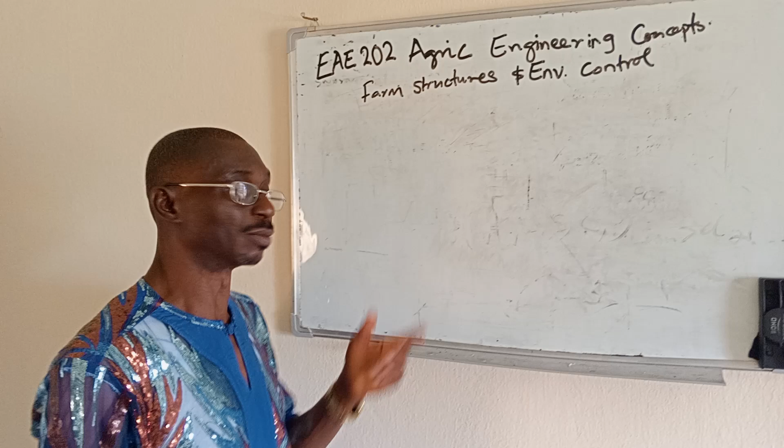So we are still continuing from where we stopped the other time, Farm Structures and Environmental Control. So you may say this is Part 2.

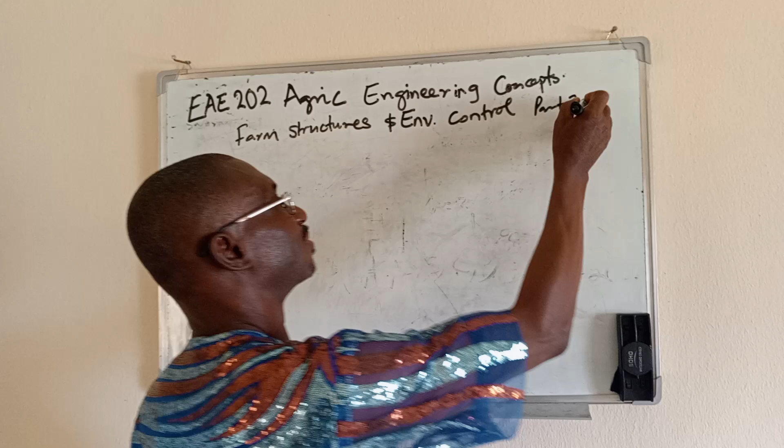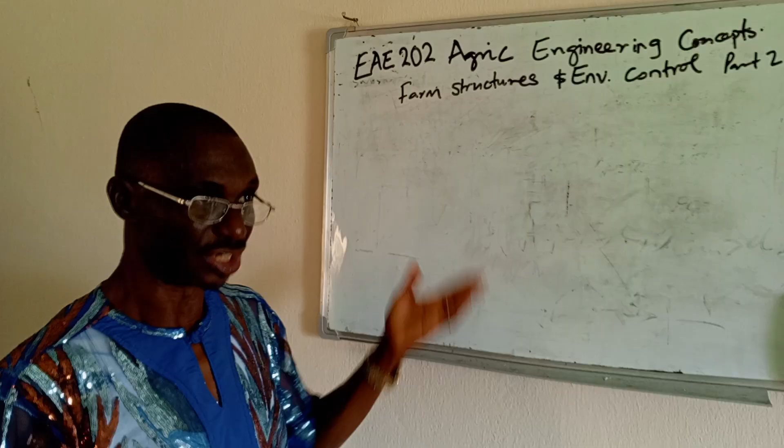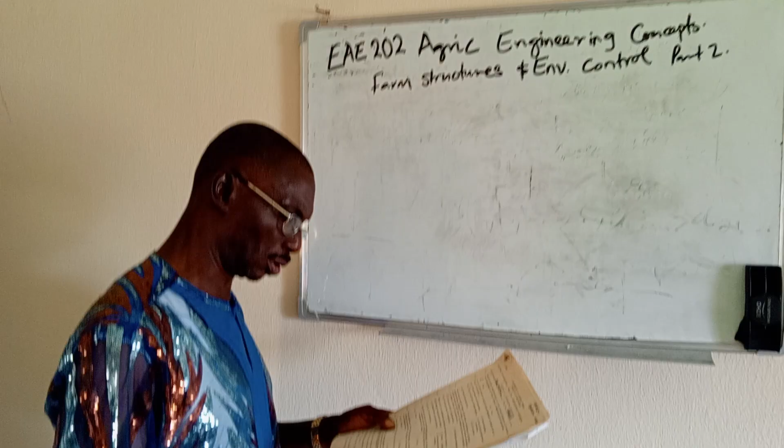So from the knowledge we gained before, what is expected of a specialist in this option? An engineer who specializes in farm structures and environmental control. From there, we can deduce that the design of farm structures, among all other things, requires a sound knowledge of the following, of the principles of...

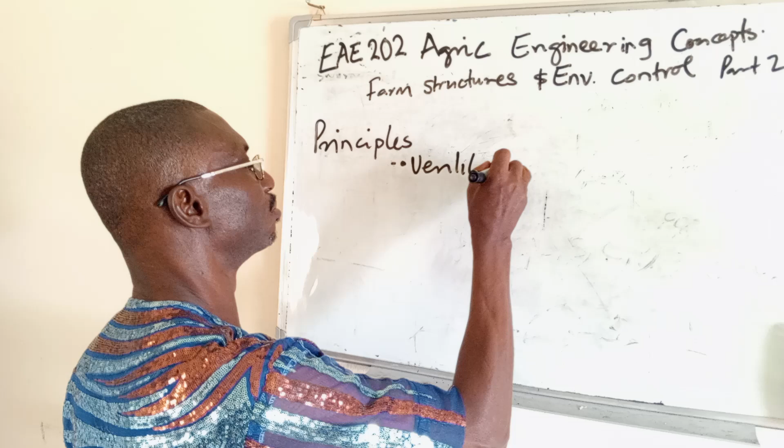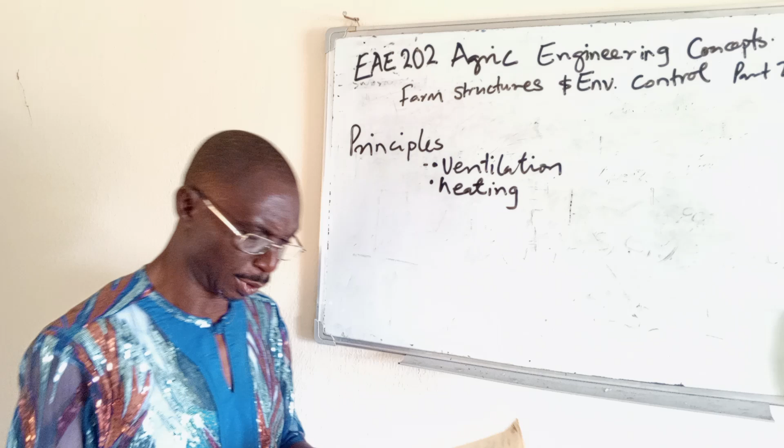Ventilation, so you require some knowledge of principles of ventilation, principles of heating, principles of cooling, and also principles of insulation.

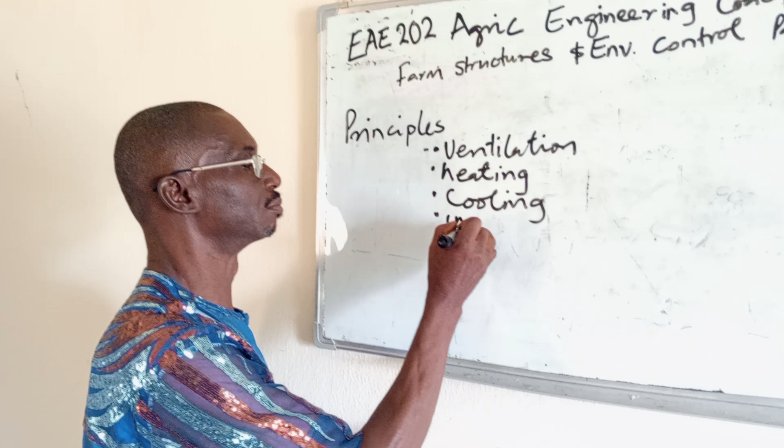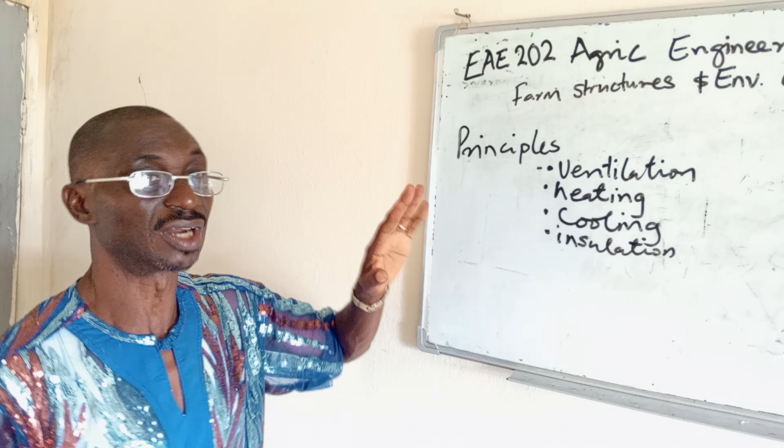So you will have a sound knowledge. If you are specializing here, you must have, this cannot be negotiated: principles of ventilation, principles of heating, principles of cooling, and principles of insulation.

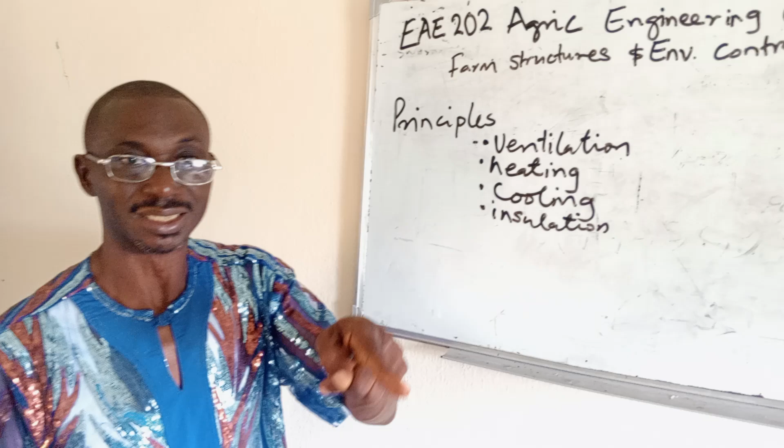You must have this at your fingertips, because if you don't know this, when you are planning farmstead, remember we say a specialist here plans farmstead planning. So you don't know where to site the residential building for the workers in the farm,

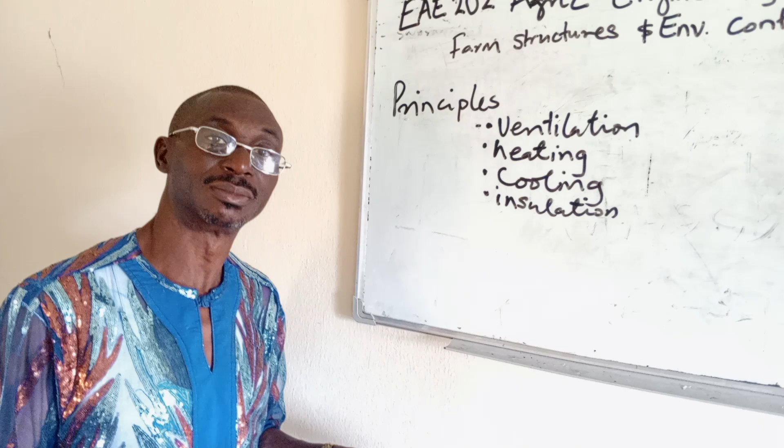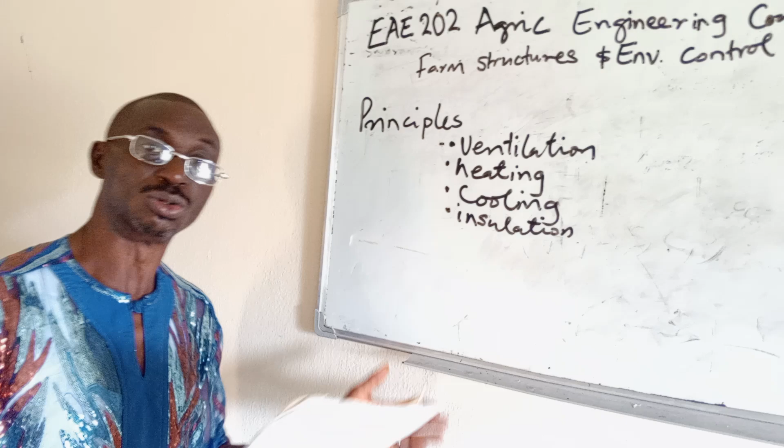the buildings or the structures for livestock. So you should know the prevailing direction of the wind, so as to know, and also the sun, so that you know where to focus, site one thing or the other, and so on. So this is very, very important.

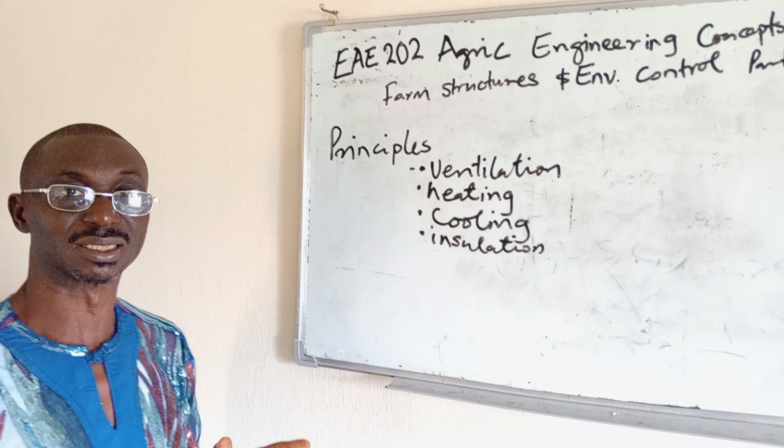If you are specializing in farm structures and environmental control, you must have the sound knowledge of principles of this, and that. So...

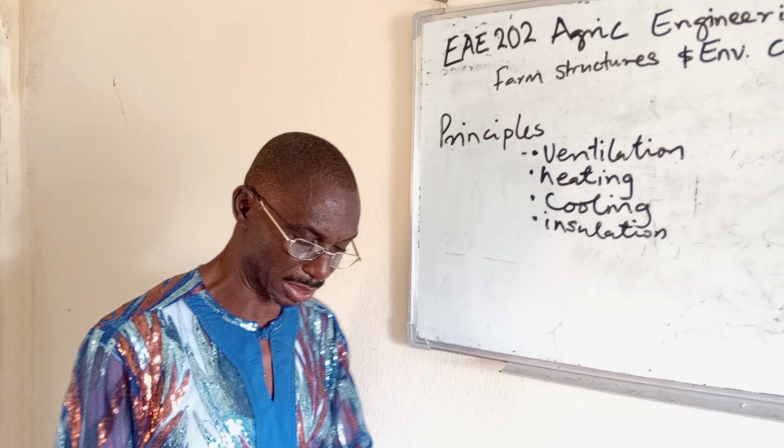You must do it. And also, why do we plan, or why do we prepare, why do we control the environment? Environment is necessary to be controlled in agricultural production setup, so that you will have optimum production.

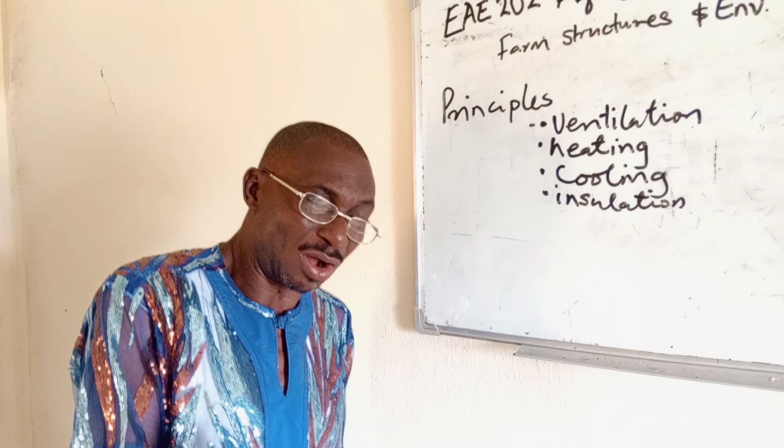Remember, we have been talking of productivity, we have been talking of efficiency. So when you do this, because the environment influences, one...

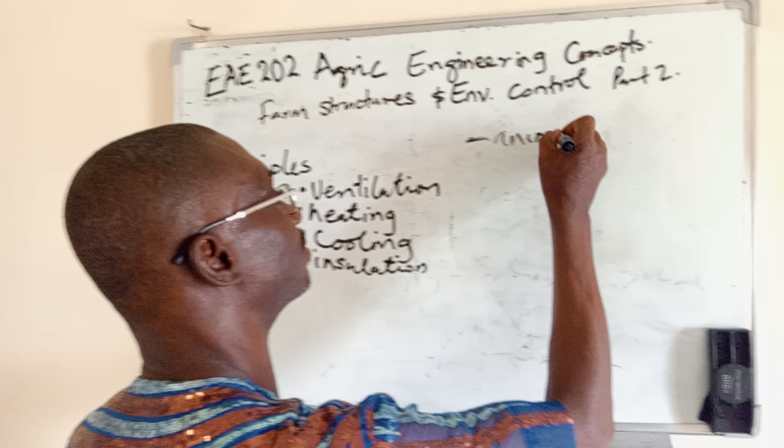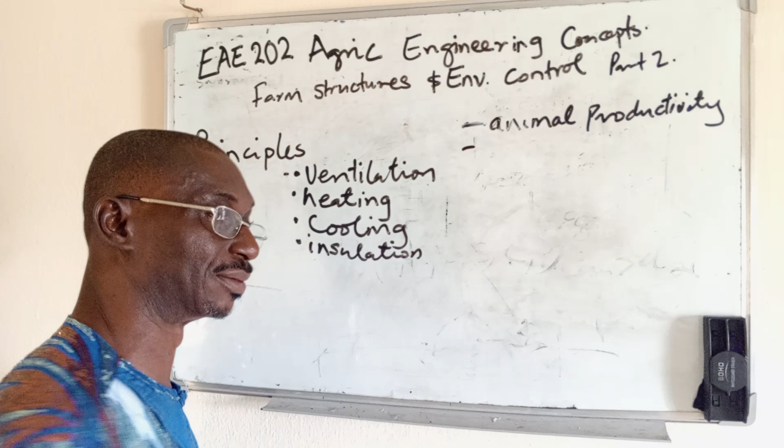Animal production. It influences animal productivity. Let's use productivity. It influences animal productivity. So that is why the sound knowledge of environment is important.

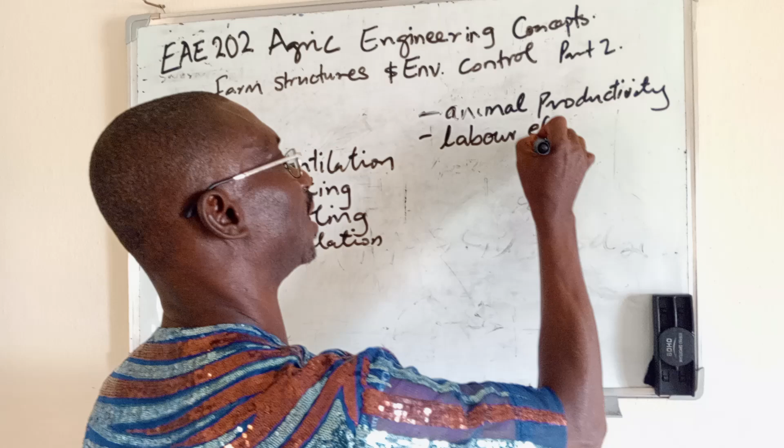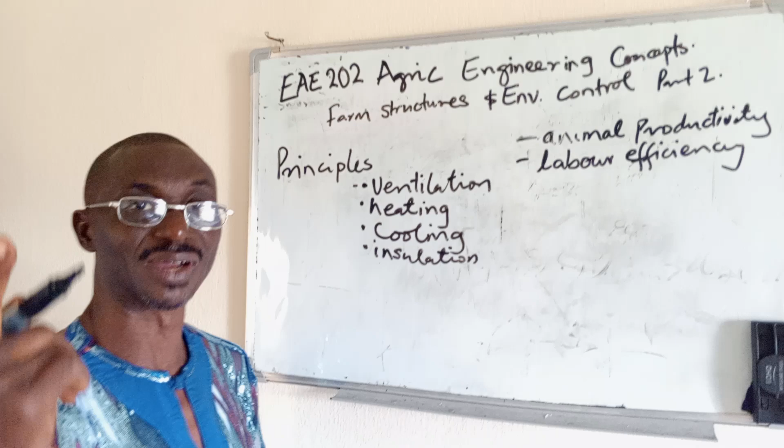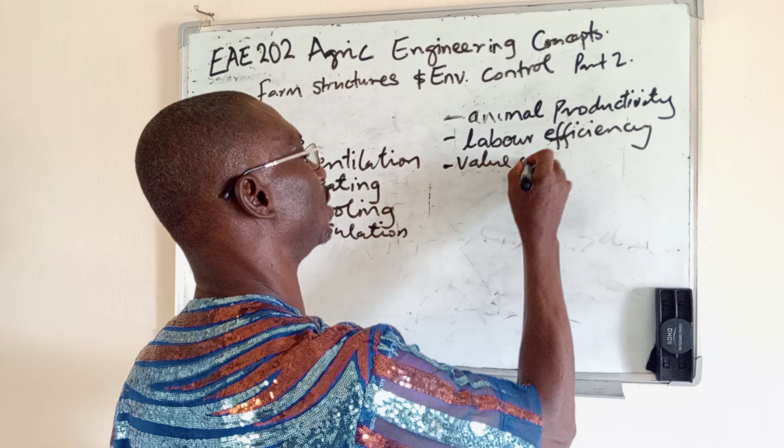And also, it influences the value of products in storage, the products in storage.

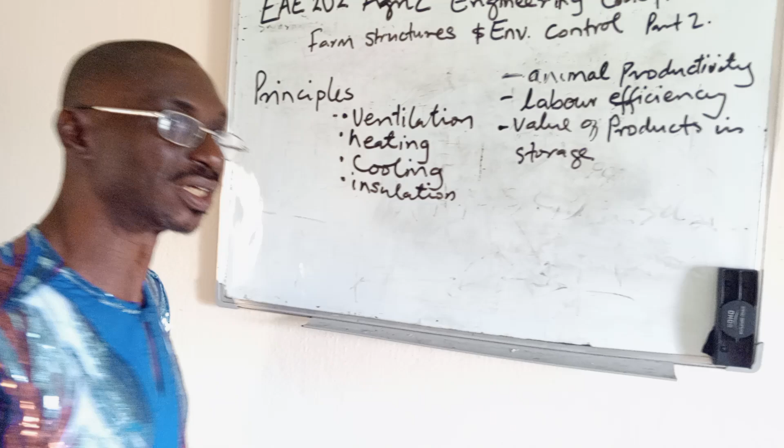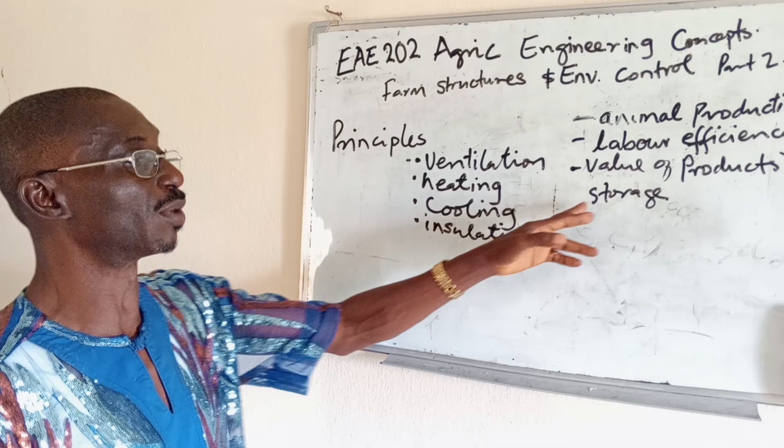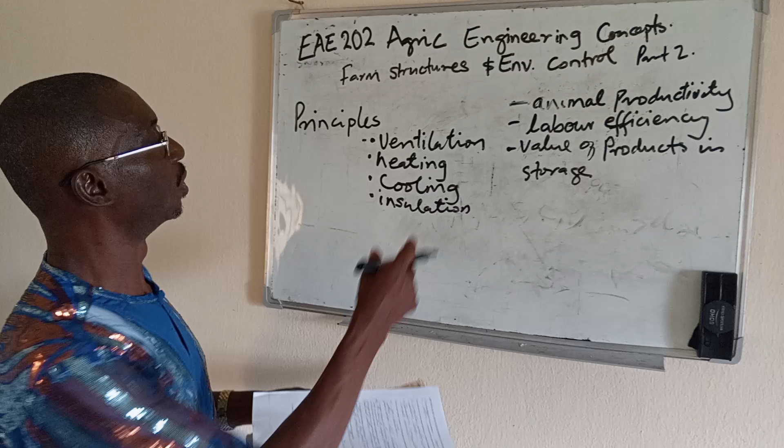So it influences, and that is where ventilation comes, because the crops in storage are living. They should be ventilated. So, and also all these principles are important, so that you know where your vent is coming in and going out. So it is very, very important, you know, to have the principles of this in order to have effective control

Of this. So with this in mind, in Part 3, we continue. Thank you.